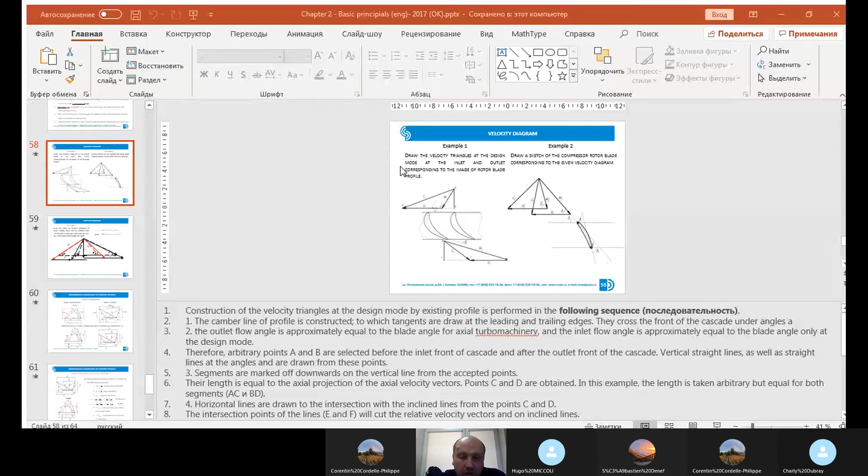So, at the previous lecture, we discussed velocity diagrams, and you made the task and successfully completed it. I hope you understand what the velocity diagram is. It's a really very important moment because it contains a lot of information. It's very important for the analysis. And if you know the velocity diagram, you know the blade shape.

That's why it's the key moment of the turbomachinery stage design process. It's the first idea. Looking forward, a few lectures in the future, I will explain to you what the design process of the turbomachinery stage is. It is not very hard, it's really rather easy. And you will see what the key position of the designing process of the turbomachinery is - it's the creating, designing of the velocity diagram. I will show you in future lectures that if you know the velocity diagram, you know everything about the stage. That's why the velocity diagram is the key position, key idea for the designing process of the turbomachinery.

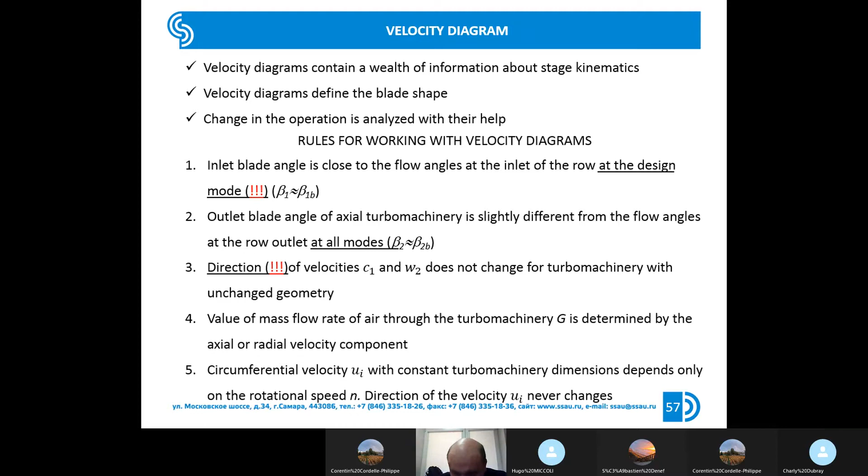So, how do you think - how many parameters do I need to choose to describe the velocity diagrams? And by the way, to describe the working process of the turbomachinery stage. So how do you think, how many parameters do I need to use to describe the velocity diagram?

7? Good choice, good try. It's close to reality, it's a good try. So okay, perfect. So it really seems like we need a lot of parameters to describe the shape of the velocity diagrams.

Okay, let's try to find how many parameters we need to use. First, let's look carefully at the velocity diagram. One second, I will change the color. If we look carefully at the velocity diagram, it looks like a trapezoid.

It's a trapezoid. That's why our aim is to set the shape of the trapezoid. So at these two velocity diagrams, we make the assumption that C1A equals C2A, because in reality they could not be equal, and we set the assumption that U1 equals U2. So let's try to find, using such assumptions, how many parameters we need to describe the shape of the velocity diagram, in other words to describe the shape of the trapezoid.

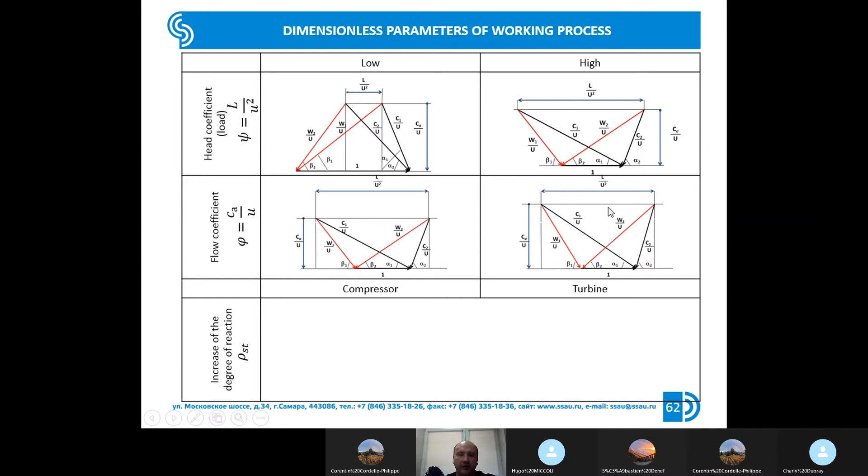And the value degree of reaction sets the position of the upper base relative to the lower base. So if you increase the degree of reaction, as far as I remember, the upper base will be moved to the right direction, but I'm not sure.

And at this slide is shown the typical range. So first we have the connection between load coefficient and flow coefficient using this equation.

And here in the tables, you see the typical range of change of the flow coefficient and head coefficient. For us, it's much more interesting to see the values for axial turbines -- it's the useful range for axial turbines of gas turbine engines, and for axial compressors.

And of course, flow coefficient for axial turbomachinery, compressors and turbines.

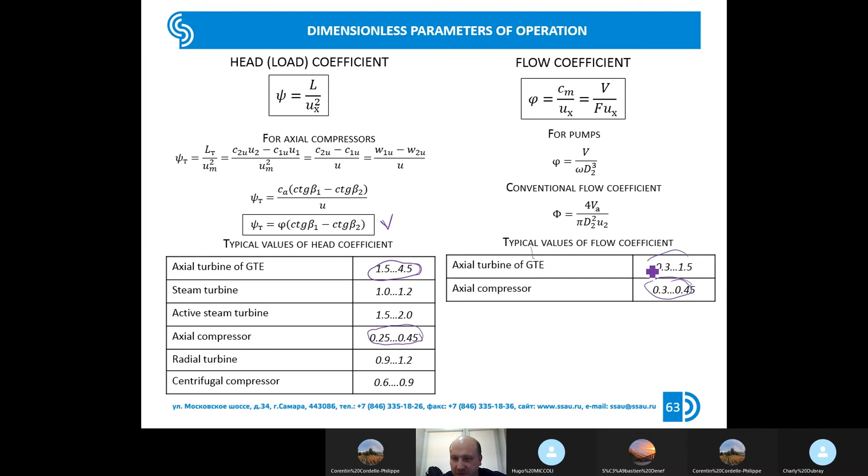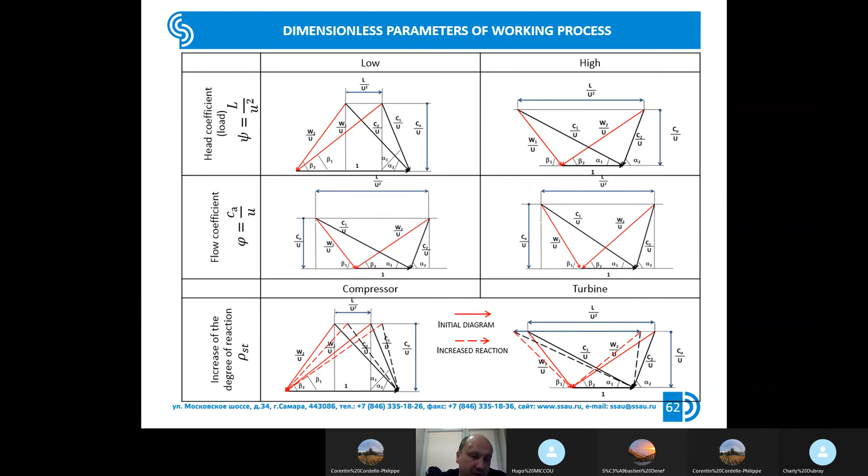So that's all in this chapter. We complete chapter number 2. So we've completed the discussion about the dimensionless velocity diagram and about the main parameters which describe the working process of the turbomachinery.

Do you have any questions here? No. Perfect. So I hope it's clear. But we will repeat this moment when we discuss the designing process of the turbomachinery stage. So that's all -- I have a second question.

Yes, perfect. You said last time there are 2 models for this velocity diagram. Yes, so we can use the second model with the upper point on the same point to show the difference between high and low.

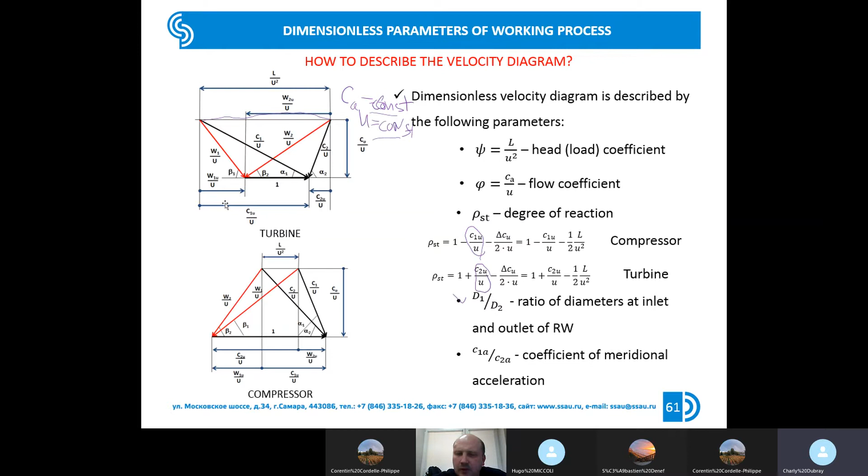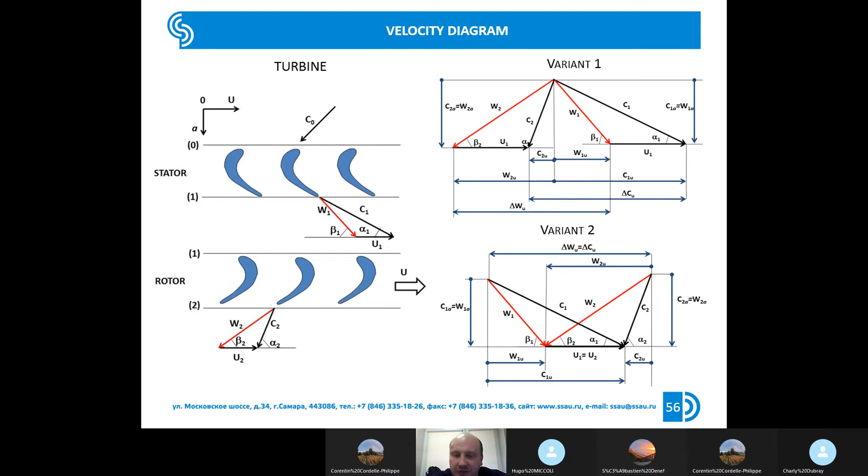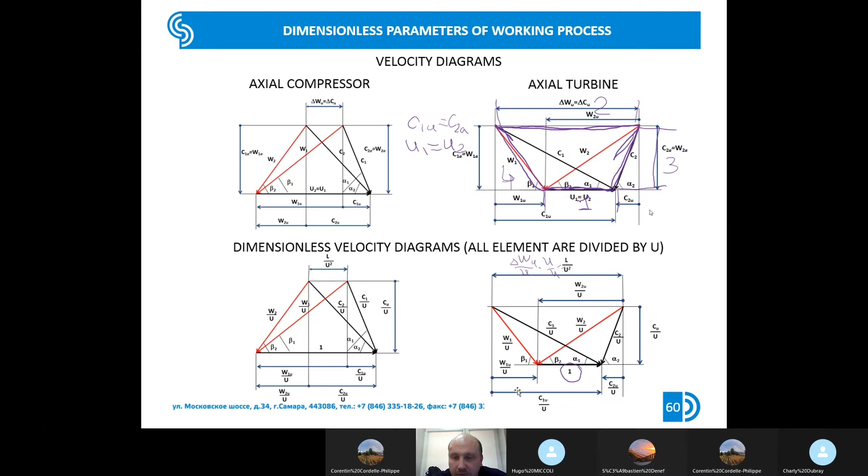So I'm not clear, what do you mean? You mean what we have? Yes, this first variant, we can't use this to show. You could use the first variant too, but for example, when we discuss what parameters are needed to describe the working process of the turbo machinery, it's more clear using variant number 2. Sometimes it's more clear to use variant number 1 to describe some changes in the turbo machinery. Of course, for students maybe it's not clear at which case it's more convenient to use which variant in different ways. But you see, in the case we're discussing here, it's more convenient to use the second approach, but sometimes more useful to use the first approach. I think in reality it's not a very big difference, because you are using the same inlet and outlet triangles to build the velocity diagrams, so I think it's not a very big difference. It depends on what's convenient for you, and sometimes it depends on the task, which variant is more convenient for explanation. Okay? Okay, perfect.

Let's change the presentation. So we are finishing the fundamentals of the turbo machinery, and at the next chapter, in general, I'm going to repeat the second chapter, but it will be concentrated information, and we will speak about the principle of operation of the compressors and of the turbine, based on the axial machines mostly. But maybe we will speak a little bit about centrifugal turbo machinery. So today I'm going to discuss the principle of operation of the compressor in general.

First, let's start from the definition. The compressor is a device in which we realize continuous compression of the working fluid, and compression is provided because we are supplying mechanical energy to the flow using special elements which we call the blades. In this definition, we need to pay attention that this type of compressor, the axial compressor and centrifugal compressor, has special features. One special feature of such compressors is that we use continuous compression with this type of device. So that's the first idea. The second idea is that we supply mechanical work, and energy exchange takes place because we use special profiled elements which are called blades.

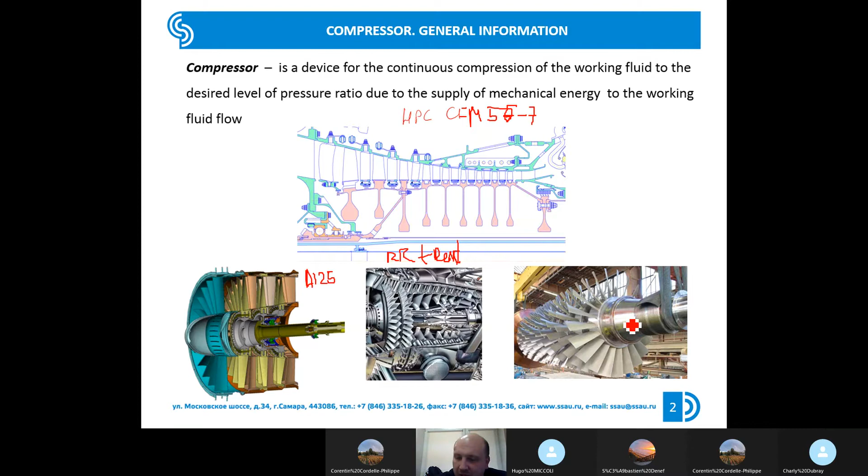So, a few words about the compressor. The compressor could be classified by number of stages: single stage and multi-stage compressor. Compressors could also be classified by the direction of movement of the working fluid: the compressor could be axial or centrifugal. As we discussed in previous lectures, centrifugal compressors are not able to achieve high pressure ratio, that's why they're not used in real practice. So in the pictures you see examples of a single stage centrifugal compressor for charging a piston engine, and a multi-stage axial compressor.

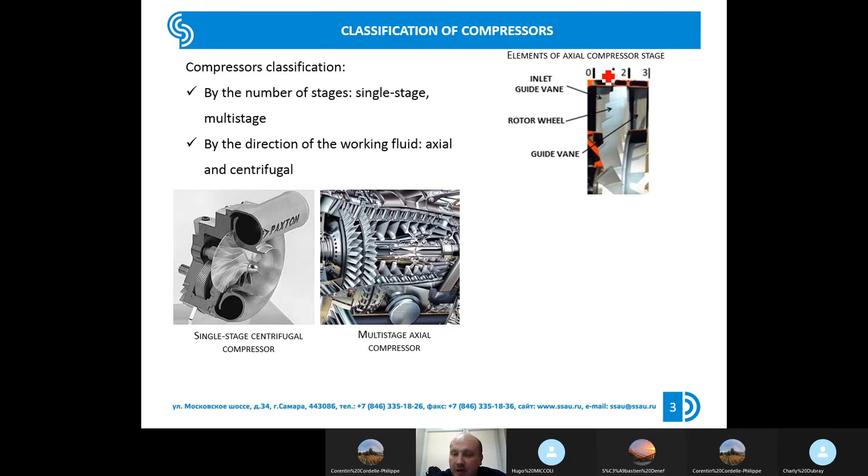So, let me refresh the information: a typical stage of an axial compressor consists of two main elements: the rotor wheel, which is set at the first position, and the guide vane, which is set after the rotor wheel. So a typical compressor stage consists of two blade rows. The first of them is the moving blade row, the rotor wheel. Sometimes at the first stages, and at separate stages, you could find an additional non-moving blade row, called the inlet guide vane. The cross sections between the blade rows have numbers: number 1 corresponds to the cross section at the inlet of the rotor wheel, number 2 corresponds to the cross section at the outlet of the rotor wheel, section number 3 at the outlet of the guide vane, and section number 0 at the inlet of the inlet guide vane.

The requirements for the modern compressor are very typical for every aerospace application. The compressor must have high efficiency, must have good reliability, good resource, must have minimum dimensions and weight, must have low manufacturing cost, and must be technological and easy to use.

These requirements are very typical for every aerospace application. There are some special requirements for compressors - the blade compressor must have a wide range of stable work. It's really very important for the turbomachinery compressor stage, because you will see in future lectures it has a rather narrow range of stable operating, and it's really a big problem for axial and centrifugal compressors, especially for axial compressors.

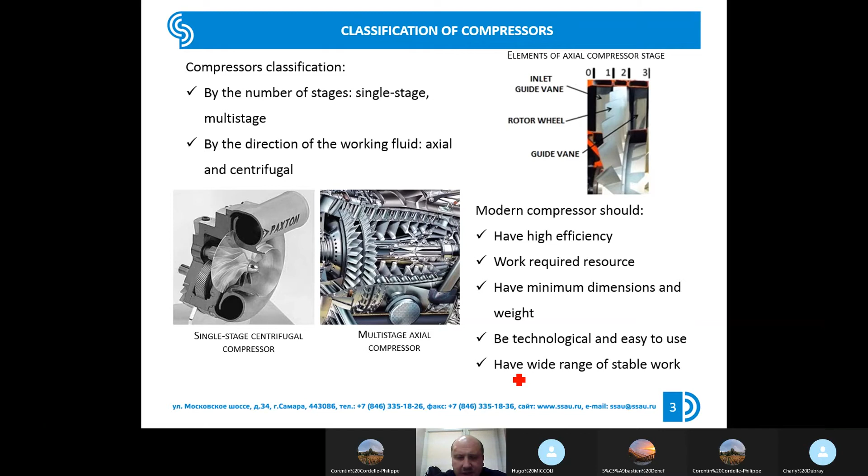Now we will speak about the principle of operating of the compressor stage, and we will explain why the pressure increases in the compressor stage. You will see in reality it's rather easy. We will start from the Bernoulli equation and write it for the rotor wheel.

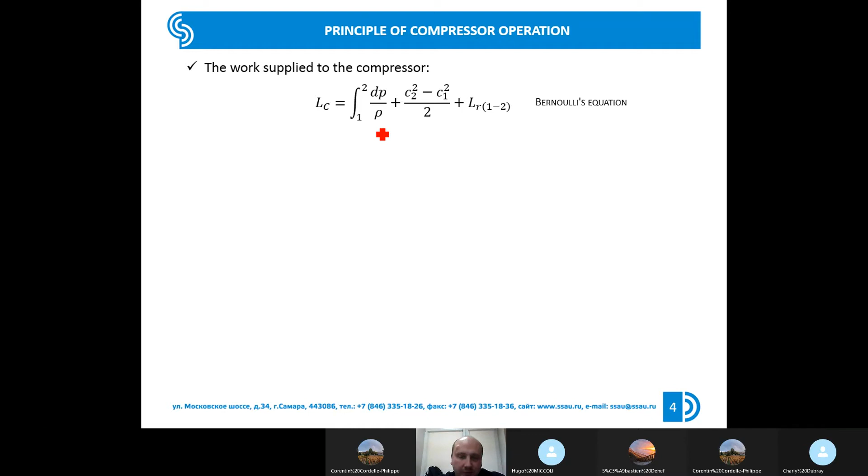We know that for the operating of the compressor we need to supply mechanical energy from outside, and we are rotating the rotor of the compressor, and during rotating we are supplying mechanical energy to the compressor. Based on this Bernoulli equation, we could say that all the mechanical energy which we supply to the compressor is spent in three directions.

First, it's spent on increasing potential energy - it's spent on increasing the pressure, by other words. It's spent to increase the kinetic energy in the compressor, and it's spent to overcome hydraulic losses in the flow path. So the specific work is spent in these three ways.

In the gas turbine engine, the main aim of the compressor is increasing pressure. That's why we need to ensure the biggest part of the supplied mechanical energy is converted into increasing pressure. That's why we need to not change the kinetic energy, and we need to reduce hydraulic losses. It's the first idea of the working process.

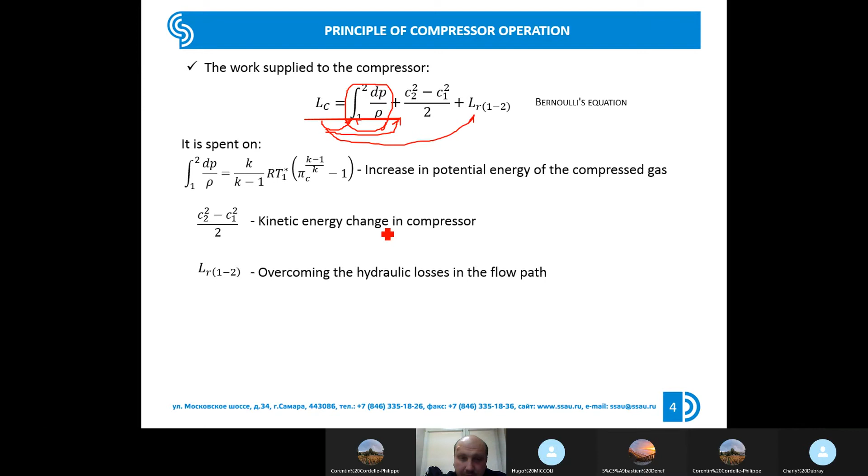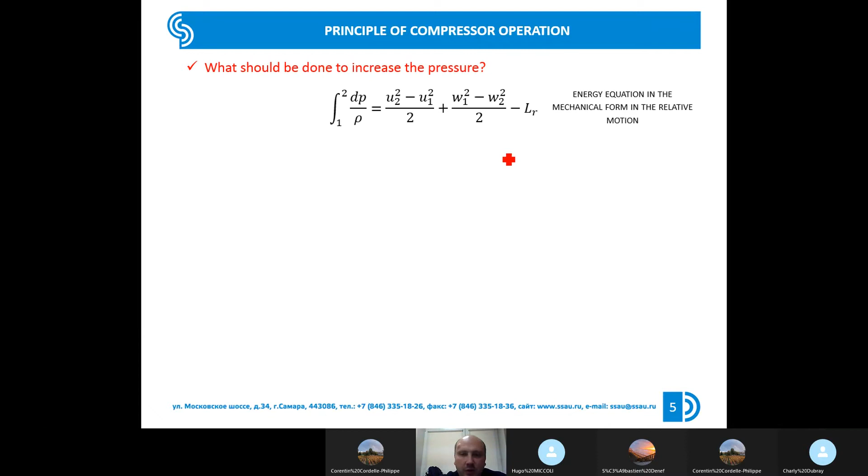For the second key point, for the second idea, we need to write the energy equation in mechanical form in relative motion for the compressor. It looks like this picture, and based on this equation, we could say that the pressure in the compressor increases due to the working fluid movement in the field of inertia forces. It's the first term. And because we are decelerating the flow in relative motion.

So by other words, to increase pressure, we need to organize movement of the working fluid in the field of action of centrifugal forces, and we need to brake the flow in relative motion. These two equations are the key points of the compressor's principle of operating, and it's really enough to describe why the pressure increases.

And if you say to guys with a low level of education, let's provide, how to say, conversion of mechanical energy to potential energy, they don't understand you. You need to say how to realize this moment in a real construction - how to realize the real construction of the compressor to provide movement of working fluid in the field of centrifugal forces, how to organize the construction, how to create the construction to organize flow deceleration in relative motion.

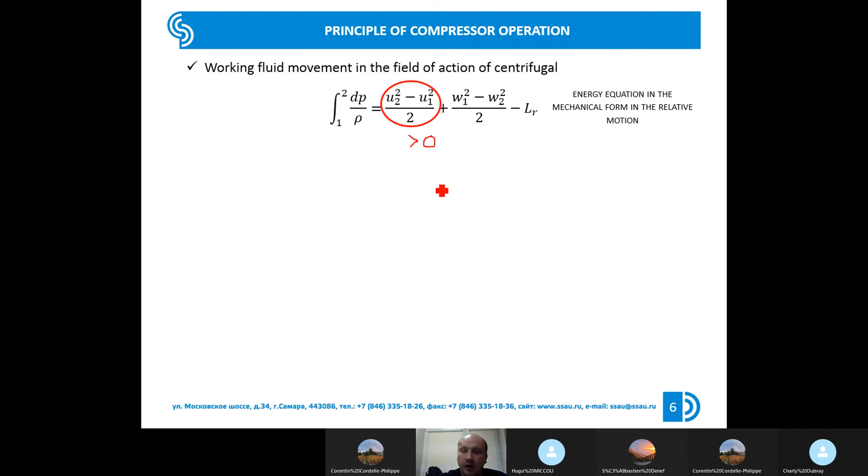To increase pressure - sorry - to increase pressure, this term must be more than zero. And it means we need to ensure that U2, the circumferential velocity at the outlet of the turbomachinery, at the outlet of the rotor, must be more than the circumferential velocity at the inlet of the rotor.

How could we organize that? Very easy. You know that the circumferential velocity depends only on two things: the radius and the angular velocity. Of course, the angular velocity is the same for the inlet and the outlet. That's why we have only one source of influence on the circumferential velocity - the radius.

And that's why, to organize the action of centrifugal forces on the flow, we need to organize a change of radius. We need to ensure that R2 will be more than R1. And how to implement it, how to realize it in the construction - you need to organize the inlet at a lower radius and the outlet at an upper radius.

And that's why we come to the scheme of the centrifugal compressor. So, if you create the compressor such that the inlet is at the lower radius and the outlet is at the upper radius, you will receive the action of centrifugal forces increasing the pressure. That's the first idea.

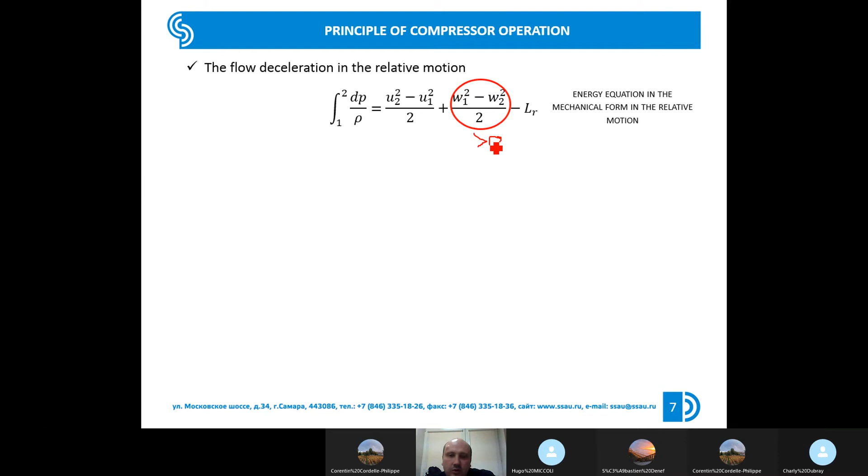The second idea, let's discuss: if you want the pressure to increase, you need to organize to make W1 more than W2. It means we need to decelerate, we need to brake the flow in relative motion. And the next question - how to brake the flow, how to organize flow deceleration?

Very, very easy. You need to create a divergent shape of the channel between the blades. In other words, you need to create a diffuser shape of the blade channel.

It's an interesting question how to explain to workers with a low level of education how to create the diffuser channel. It's very easy: if you create the angle at the inlet lower than the angle at the outlet, you will receive the divergent channel between the blades. Using this relationship, you could explain to your workers how to create the compressor blades. Of course, in reality you will set the real values of angles.

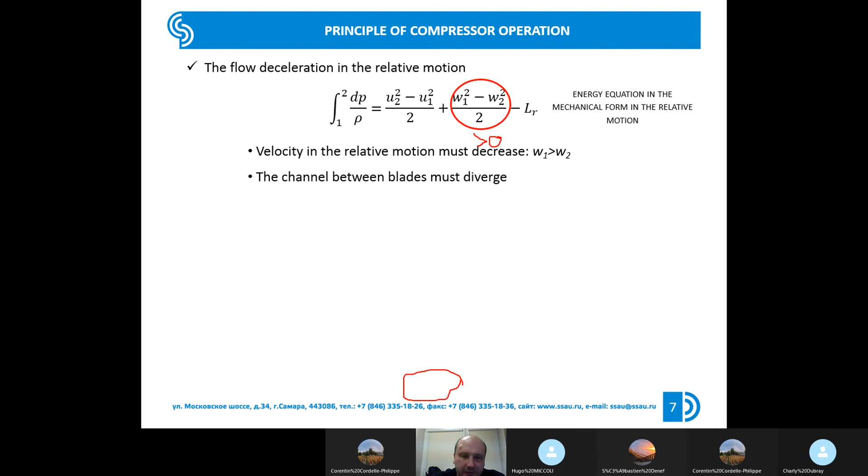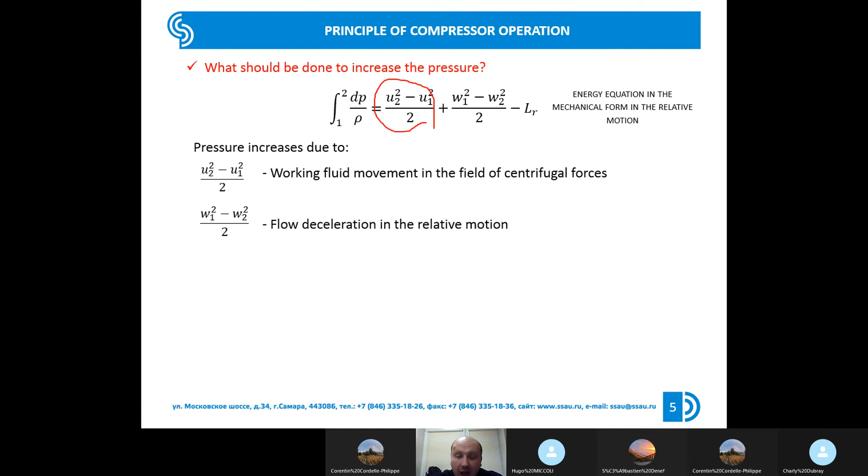So I think that's all. My explanation may not be very good, especially in English, but I want to show you the principle of operating the compressor very simply. You are based on this equation, and based on this equation you are saying that pressure increases because for increasing pressure we need to provide movement of the working fluid in the field of centrifugal forces and decelerate the flow in relative motion.

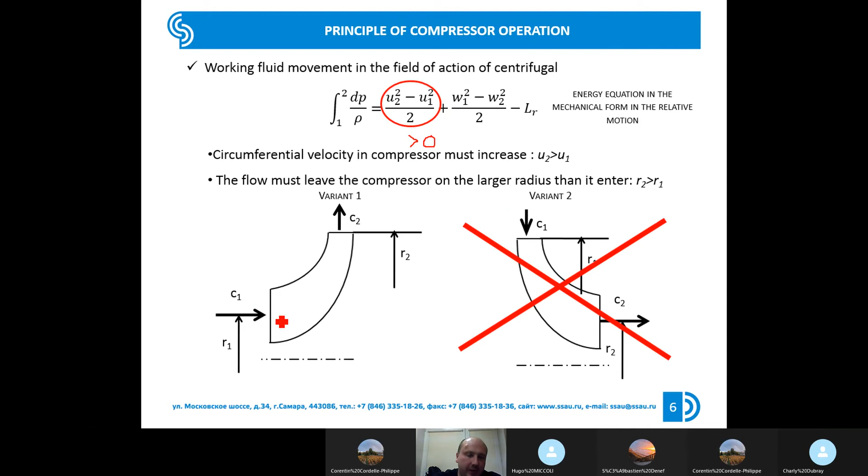At the next step you explain how you will realize it in real construction. You organize movement of the working fluid from lower radius to upper radius, and you organize braking of the flow using a diffuser channel. That's all.

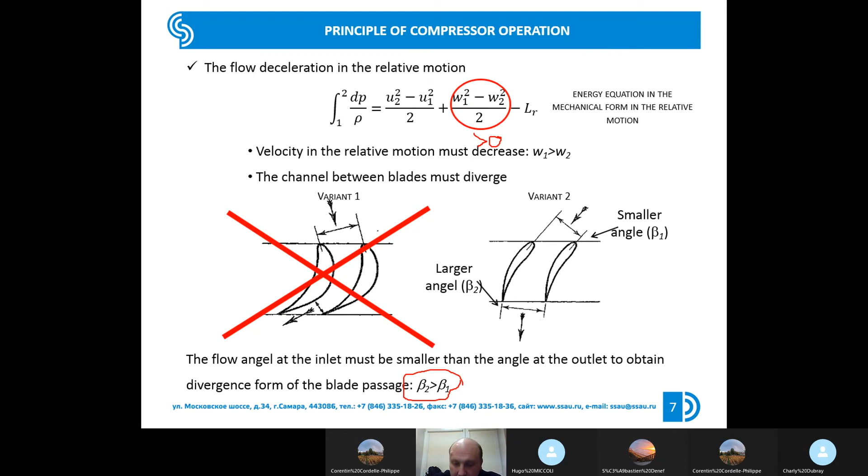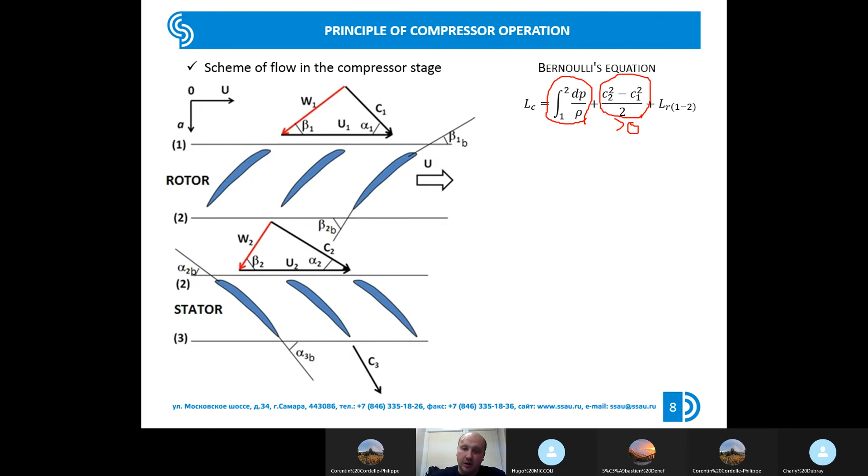After that you say that when you supply mechanical energy, you increase absolute velocity at the outlet of the rotor, and this means you transfer part of your mechanical work into kinetic energy. But it is not our main aim to increase kinetic energy. Our main aim is to increase pressure, and that's why we need to convert the excess kinetic energy to the potential energy of pressure. That's why we are braking the flow in the guide vane after the rotor wheel, to convert velocity to pressure. That's why we need to use a guide vane.

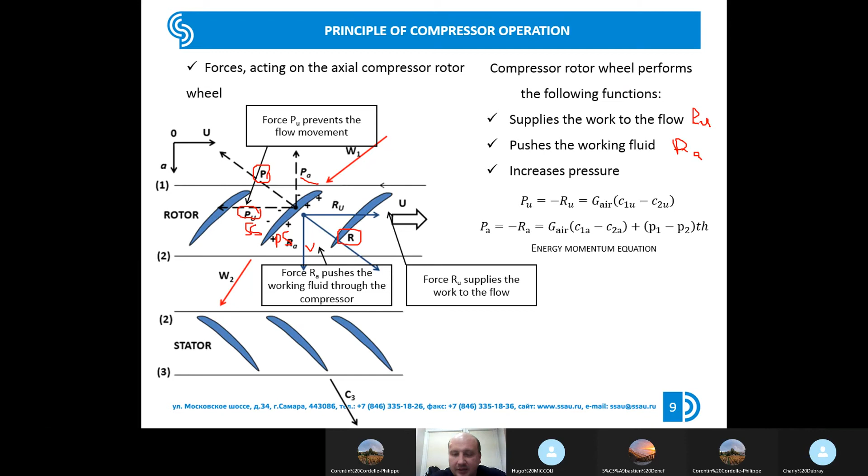After that, we say that the main function of the rotor wheel is supplying mechanical work, pushing the working fluid through the compressor, and increasing pressure. At the last idea, we explain why the blade height will be reduced from inlet to outlet. So that's all about the principle of operating.

So, guys, it's important, it's an important part. I think it's the most important information, one of the most important pieces of information in this course. That's why I need you to understand this part. So, do you have any questions?

Yes, for me it's not clear yet the main goal of the guide vane. Okay, so to guide the flow, yes, but the main goal, no, I don't understand. The main goal is to convert the kinetic energy to pressure.

Because you are supplying mechanical work, you receive high absolute velocity at the outlet of the rotor. Yes, you receive very high C2. It means you have high kinetic energy. You need to convert it to pressure. You need to convert velocity to pressure. How could you organize it? You need to brake the flow.

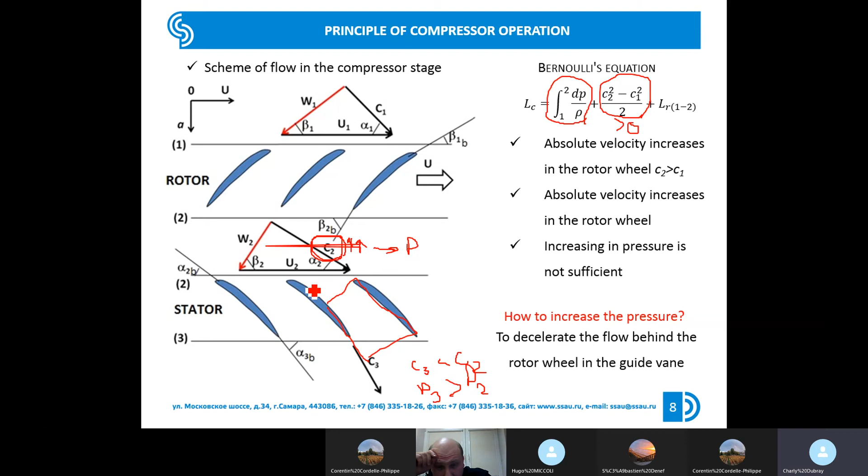What if you are not supplying mechanical energy into the flow? It means a non-moving channel. The velocity and pressure will be changed oppositely. If in a non-moving channel you reduce speed, you will increase pressure. But we need it, and that's why we put a non-moving channel, because we don't need to supply mechanical work at this moment. Okay, perfect.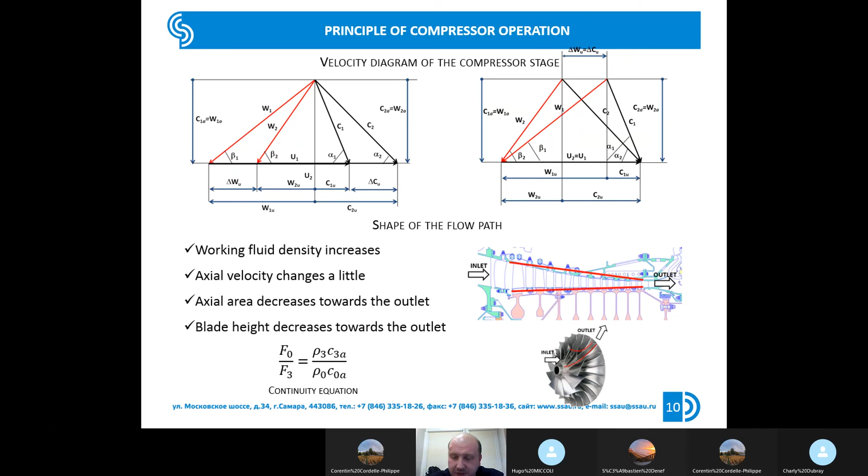So let's continue to discuss the working process of the compressor. I will try to do it fast, but it's not a lot of material. So I want to discuss with you how the main parameters are changed along the flow path of the compressor.

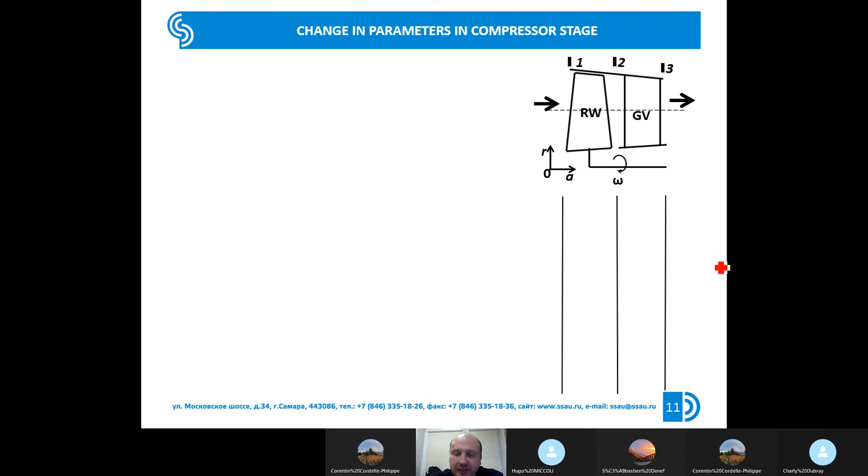So I want to discuss how the main parameters like pressure, density, velocity are changed in the rotor wheel and the guide vane. We could explain it mostly based on the principle of operating. As you remember, in the rotor wheel, we reduce relative velocity, because we are organizing the diffuser channel. That's why the relative velocity will be reduced in the rotor wheel.

Absolute velocity in the rotor wheel will be increased because we are supplying mechanical work. In the guide vane, we are organizing the diffuser channel, and that's why we are reducing the absolute velocity in the guide vane. And you see the changing of absolute velocity in the compressor stage has a maximum.

At first we are increasing velocity, and after that we are reducing velocity. Very often we reduce approximately to the same value of velocity. It's really a typical design practice, then the inlet velocity approximately equals the outlet velocity. But you see, this explanation comes from the principle of operating.

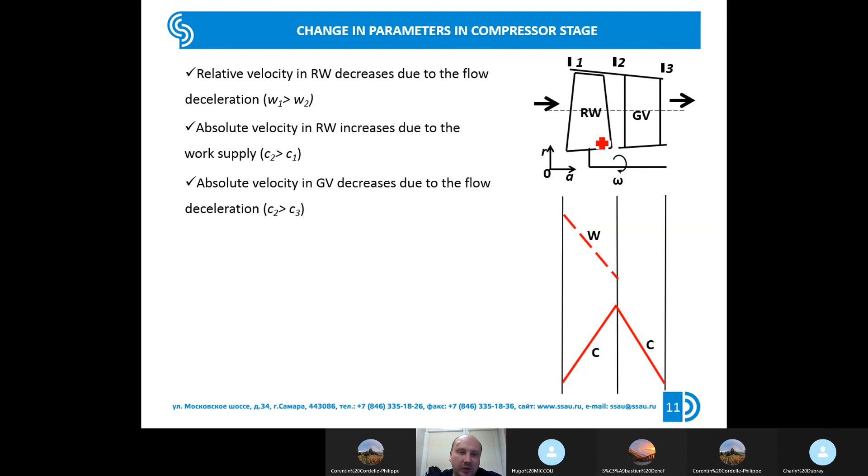So maybe returning back to the previous discussion, maybe it's not clear, but in the rotor wheel, we are realizing braking, reducing velocity in relative motion. And in the guide vane, we are organizing reducing velocity in absolute motion. Maybe this moment is not very clear.

So, because we are braking the flow in the rotor wheel, we are achieving an increase of the static pressure. And because we are reducing absolute velocity in the guide vane, the static pressure continues to increase in the guide vane. So these graphs are explained by the principle of operating.

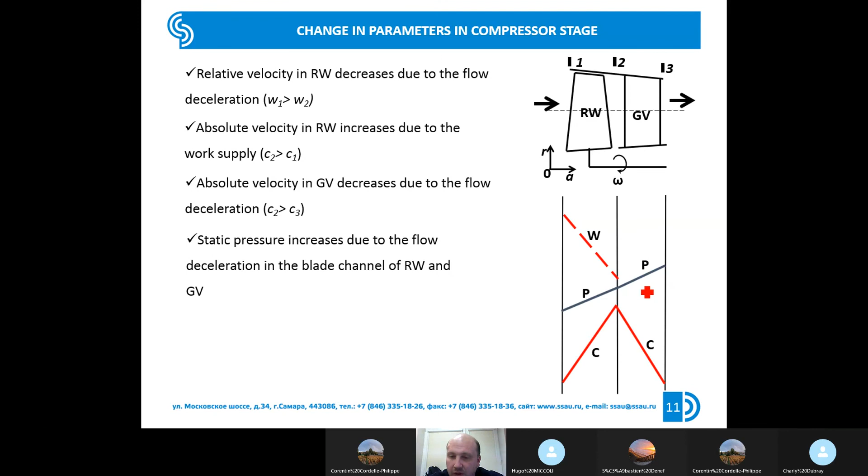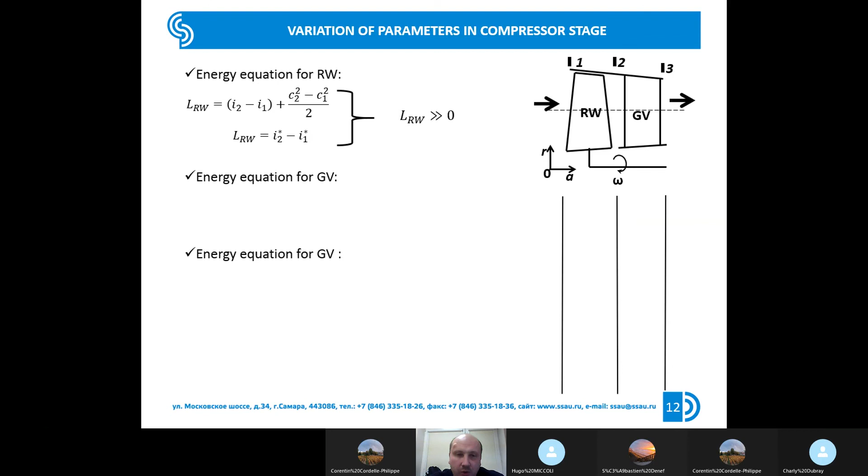About the total parameters and the temperature, they are explained based on the energy equation. So if we write the energy equation for the compressor, you will see in the compressor we are supplying mechanical work. That's why total enthalpy, and of course total temperature, will be increased, and static enthalpy and static temperature will be increased.

In the guide vane, static enthalpy will be increased based on this equation, and total enthalpy will not be changed because we are not supplying mechanical work. This means the total temperature will be constant. And approximately the same explanation deals with the total pressure.

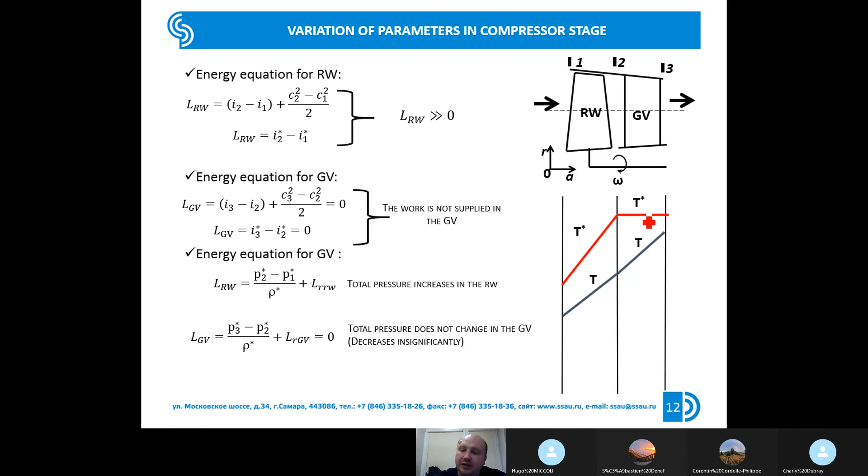As you remember, I hope, total pressure changes only in the case when we are supplying mechanical energy, and that's why total pressure will be increasing in the rotor wheel and must be constant in the guide vane. But because we have losses in reality, total pressure will be a little bit reduced in the guide vane. The value of reduction is not so big, I think in most cases not more than 5%.

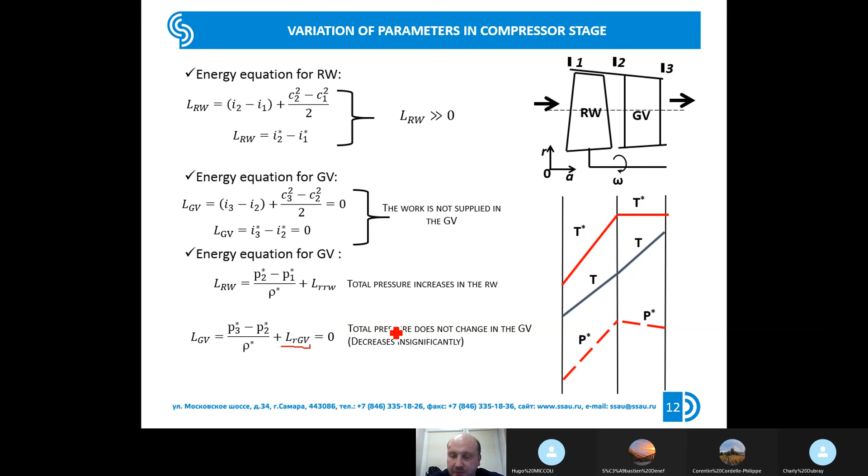So it's a very short explanation dealing with such graphs. And the last idea for today: the main parameters which describe the working process of the compressor are two parameters. First, pressure ratio — the relationship between the pressure at the outlet of the compressor and the pressure at the inlet of the compressor. This value shows how many times the pressure in the compressor is increased.

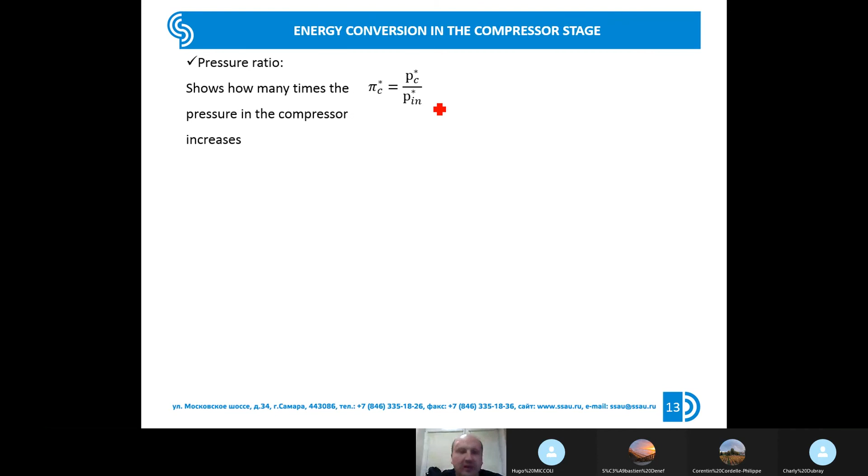It's a very interesting moment because every student dealing with turbomachinery, dealing with the gas turbine engine, knows this equation, knows this formula, but I'm very surprised that most students couldn't explain the physical meaning of this formula.

And the next important parameter is the efficiency. But before we discuss efficiency of the compressor, let's try to understand the energy balance, energy conservation in the compressor stage. So, how is the energy converted in the

compressor stage? We are supplying some mechanical work from a source of energy. Usually we are using the turbine, but in reality it could be any source which you have. It could be a piston engine, it could be an electrical engine.

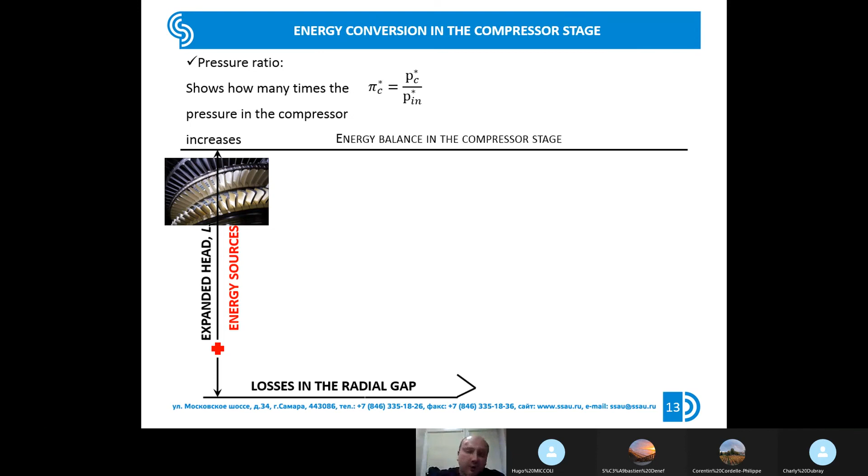First losses: we lose some energy in the radial gap with the leakages. And we lose some energy to overcome friction on the surface of the disk, because the disk is surrounded by gases, and we have boundary layers, and we have friction, which tries to reduce the rotational speed

of the rotor, and we need to spend some energy to overcome friction on the disk surface. All energy which we don't spend to overcome losses, we use to transfer through our blades to the flow. And this energy could be calculated using the Euler equation.

So we are supplying this energy from the blades to the flow. Of course, not all the energy is spent to increase pressure. Of course, we spend some energy to overcome hydraulic losses in the blade channels.

And I remind you that this moment leads to an increase in the temperature of the flow, because you know all losses finally convert to heat and finally lead to increasing temperature of the working fluid. But in the compressor, this leads to needing additional work to compress the more heated gas.

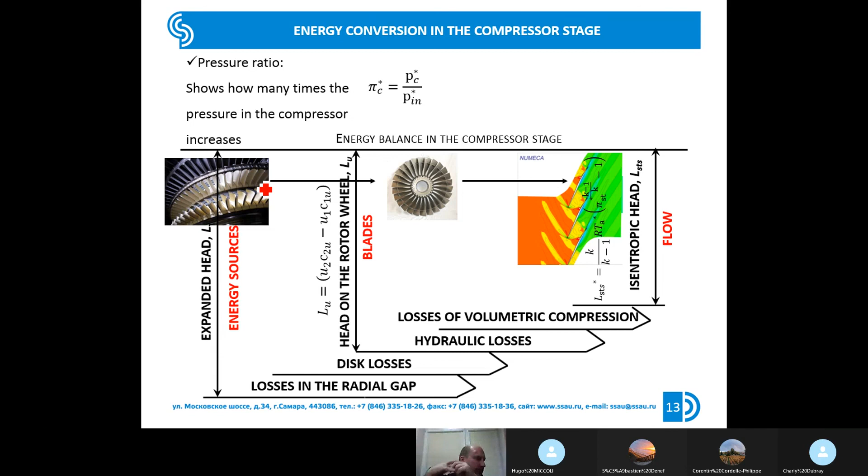You see that we transfer energy from the source of energy to the blades, and after that from the blades to the flow. And based on these steps, we could explain what efficiency of the compressor means in common.

The efficiency of the compressor is the relationship between the useful work and the expended supplying work. In the compressor, it's very easy to explain what work is useful and what work is expended.

What we are finally receiving in the compressor - in the compressor we receive compressed air. That's why the specific work of ideal compression will be the useful work in the compressor.

And what do we spend to create the compression process in the compressor? We supply energy from outside. And that's why the energy which we supply from the source of energy will be the expended work in the compressor.

So that's all about the compressor. Today's lecture is very important because especially at the first part of my course, you need to understand two main things: the principle of operation of the compressor and the principle of operation of the turbine. That's why today I'm trying to summarize all information dealing with the compressor from the second chapter, and formulate the explanation of the principle of operation of the compressor, explain how the parameters change along the flow path of the compressor, and explain compressor efficiency.